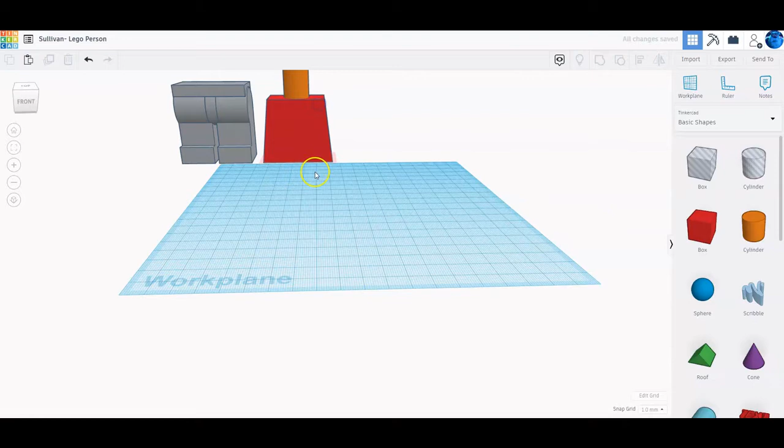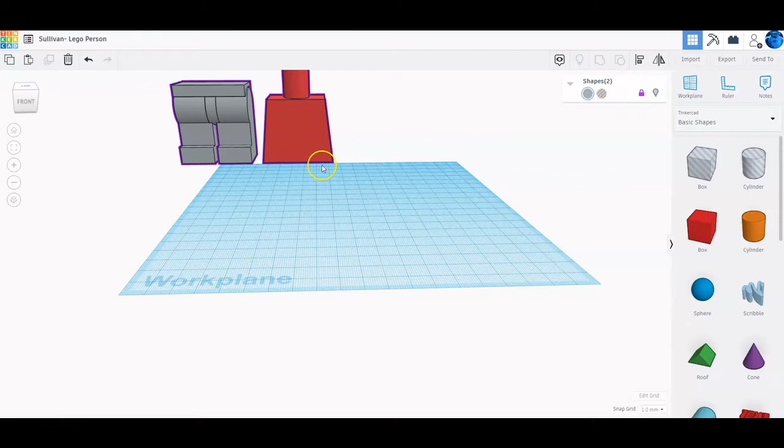First, we're going to take these two back here and select them. We're going to select both of them and lock them. All I did was click the little lock in the inspector window. That makes it so I can't move them around, select them, or group them with something else. Just makes it a little easier so we can still utilize this work plane.

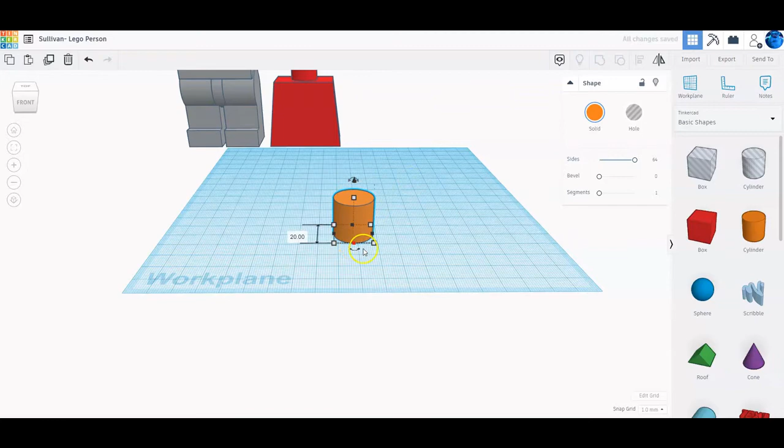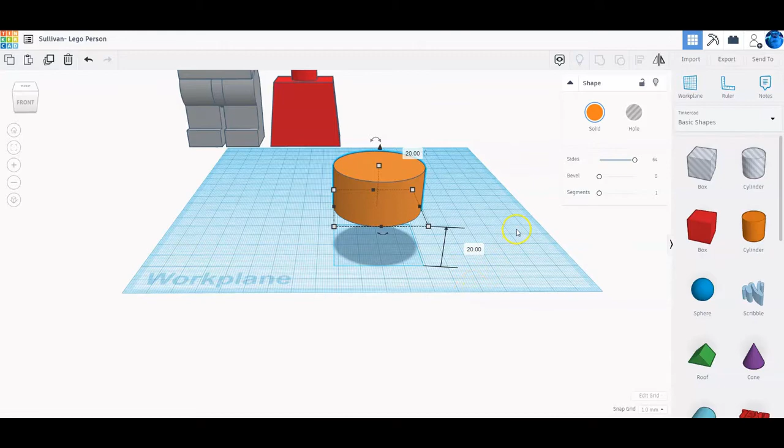So the first thing we're going to do for the head is bring out a cylinder. We're going to change the number of sides because we want it nice and smooth. Then we're going to resize it, only resizing the X and Y to 41, so 41 by 41 by 20. Then we're going to lift it up 20, remember you're looking at this number right here. Now we have essentially the main portion of the head right there.

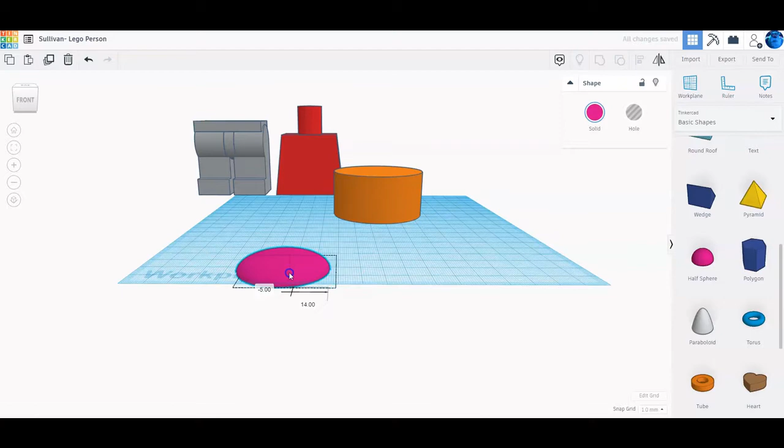Now we need to create the rounded portion on top and bottom, so we are going to use a half sphere. We'll bring that out and lower the Z down to 7.5. Then we're going to take this and also go to 41 by 41. That is going to be the rounded portion of the head.

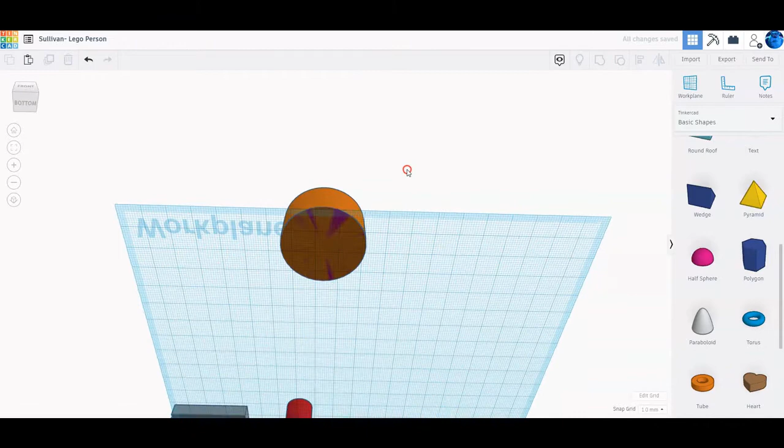Now we're going to take that, lift it up 20 just like we did with the cylinder. Then we're going to select both of them and align them, so we want to go centered here, and then centered here, to where unless you look underneath, you really won't be able to see the half sphere. The reason why we did that is because now we can select the cylinder, press the D button on your keyboard, and it drops down perfectly aligned.

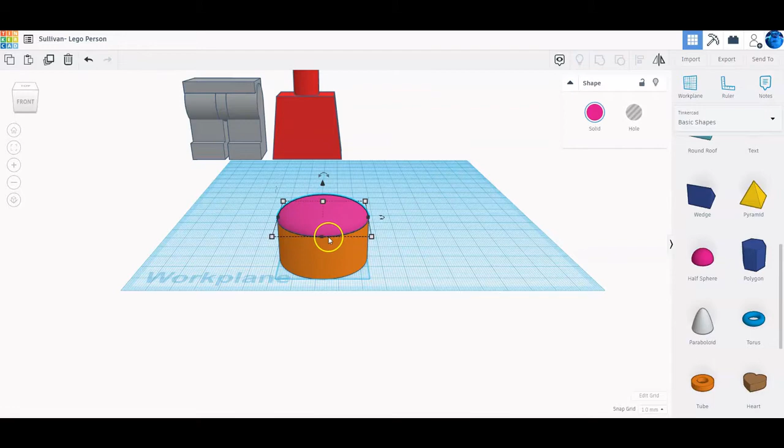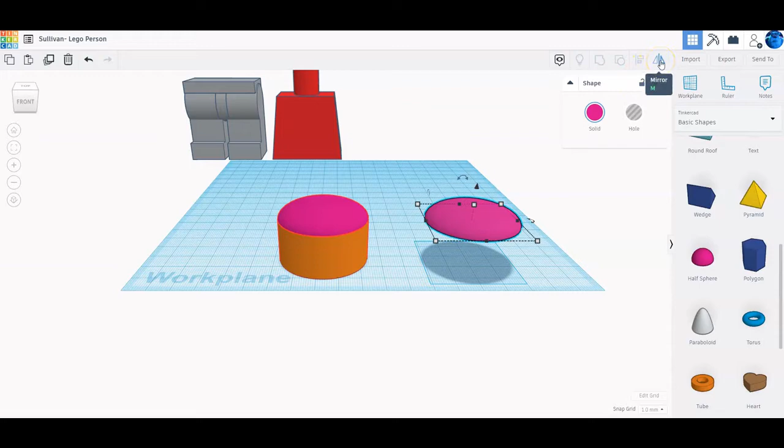Kind of cool, huh? So now I'm going to select the half sphere, duplicate it, and move it off to the side. Then I'm actually going to group these two together like this. Once it's done there, we'll give it a minute. I'm going to flip this one using the mirror tool, and flip it like that.

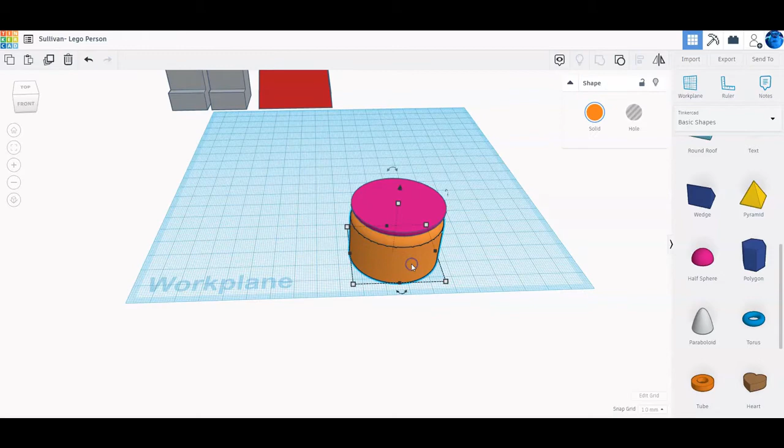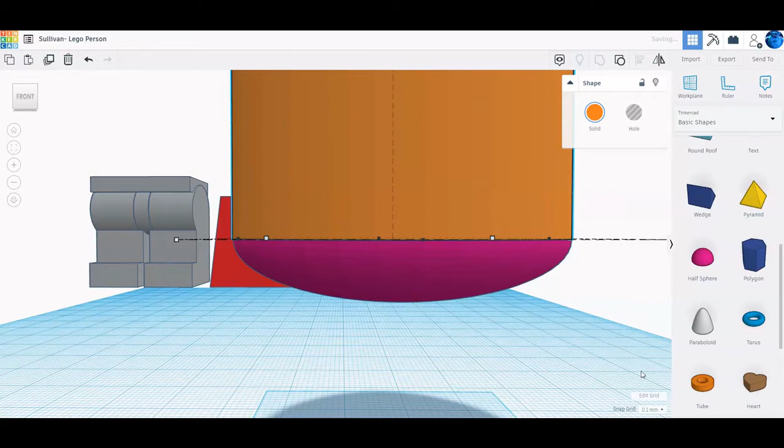Then I'm going to do the alignment to center and center, and from here I am then going to take the main portion of the head and lift it up until it is aligned. We can double check and make sure that is actually aligned by looking at it like this. See how we can kind of see through it a little bit? Let's change the snap grid down to 0.1, hold Control and use that down arrow, and slowly drop it down until it is perfectly aligned. Now we select both, group it together.

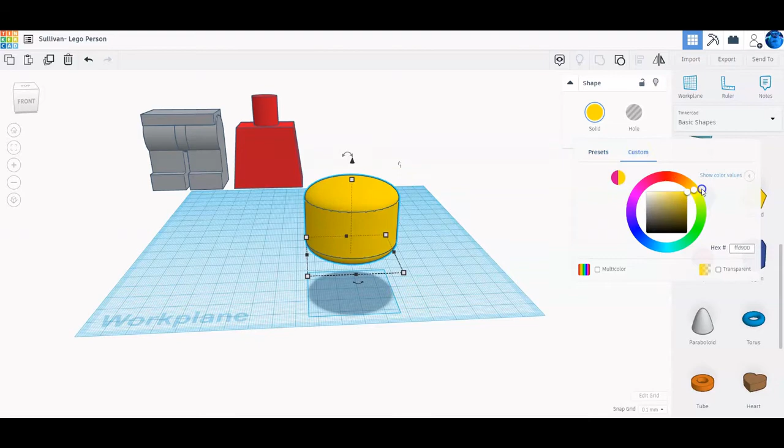And then let's change it to yellow. So we have the main portion of the head. It's kind of a weird yellow, let's change the yellow here. There we go, that's more like what it should be.

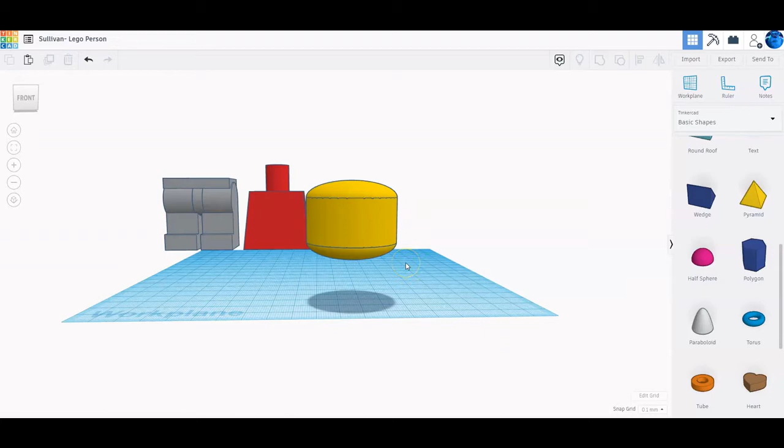Alright, so now we need to make the neck for the head and the top for the head. Both of these are going to follow pretty much the same process, just one's going to be a little bit bigger than the other. So we're going to bring out another cylinder. First, let's get this guy out of the way a little bit. We're going to bring out a cylinder, and for this one we're going to resize it. We're going to keep it 20 by 20, but we're going to go from 20 on the Z to 8.

And then, of course, change the sides to make it nice and smooth.

Once that is done, we're going to grab a hole cylinder, bring that out. Same thing, sides go to 64. And then for this one, we're going to change all three axes.

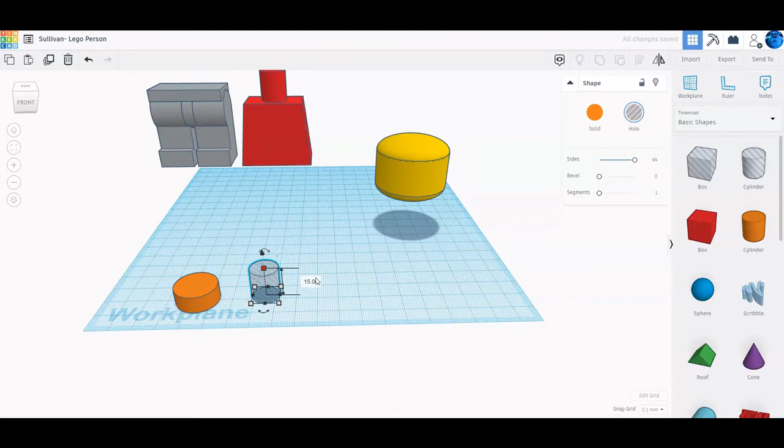We're going to go to 13 by 13 by 15. There we go, 15. And then from here, we are going to align these two. So centered, centered, and group.

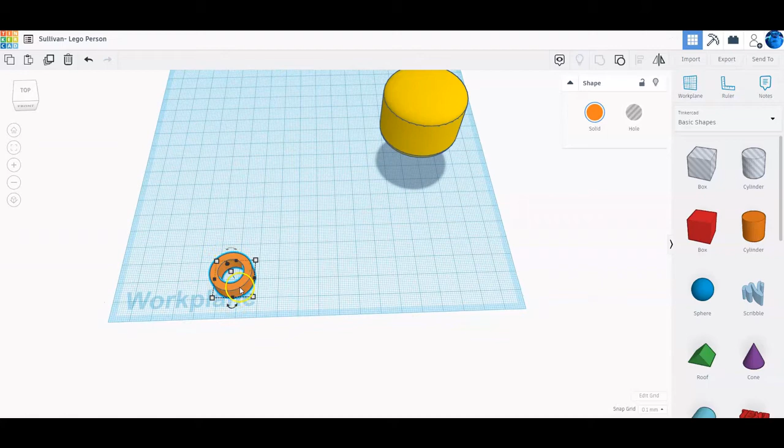So we're going to cut out the center portion of this circle right here. Alright, now let's take that, we're going to move that off to the side. We're going to do pretty much the same thing. So we're going to bring out another cylinder, change the sides to 64.

This one we're going to resize to 27 by 27 by 6.

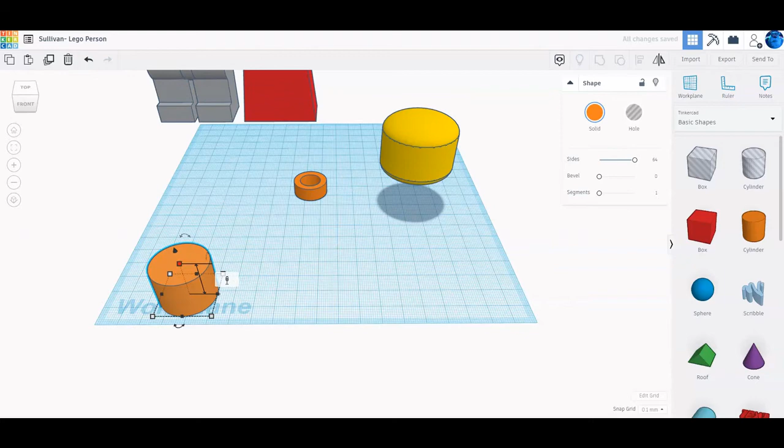Okay, then another hole cylinder. Sides go to 64. And then this one, we're going to change to 19 by 19 by 14.

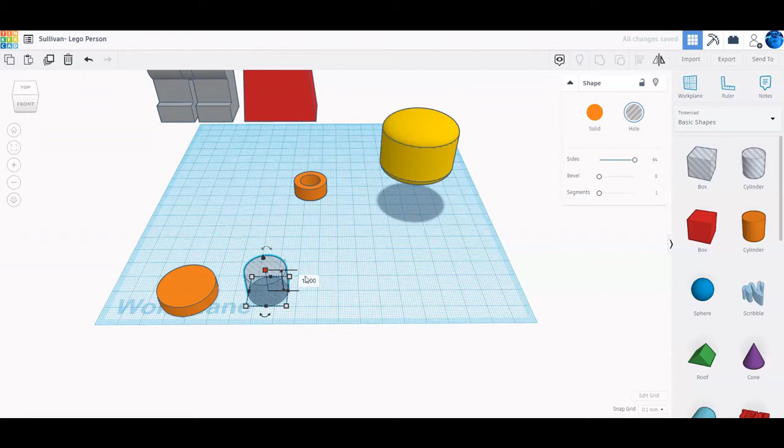And then I'm pretty sure you guys can guess the next step. If you guessed alignment, you guessed right. So we're going to align it, we're going to center it, we're going to group it, and you now have the neck.

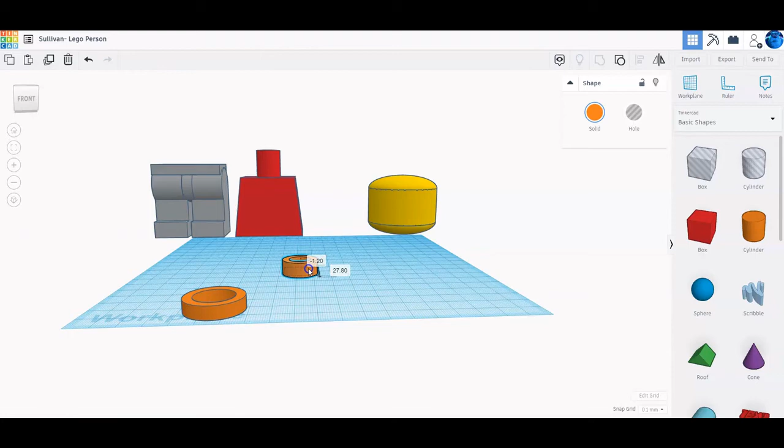Okay, so what we're going to do now is we're going to bring this one over and this one over. You can see kind of that blue box that's underneath it. That's how you can kind of see generally where it's at. And we're going to lift this up because we want this above the head.

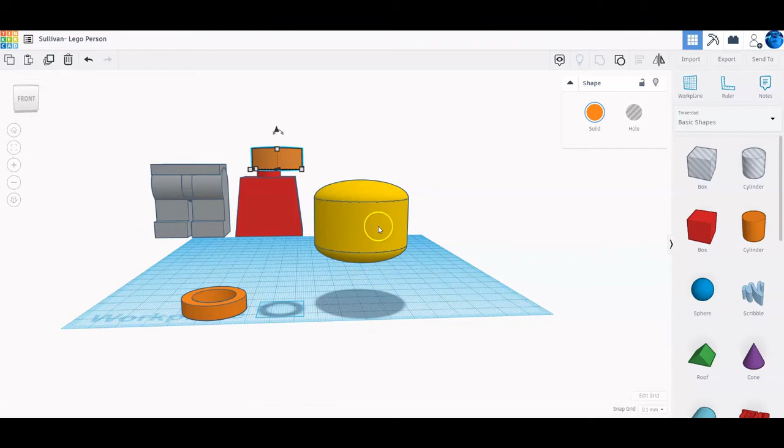The reason why we did that is because we're going to center this and then we're going to slowly move things around. So I'm going to go to where I can select all three of these. I'm going to go to center, so I'm going to center along the X, center along the Y, and then from here, I will move things around.

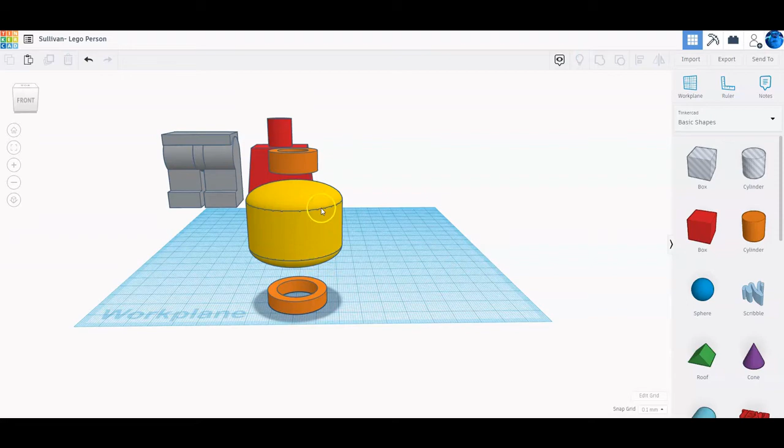Alright, so I'm going to start by moving the top two, and I'm going to bring it down onto the neck, and then I'll move the top back onto it. So I'm going to select the top portion of the head and the main portion of the head, and then I'm going to drop those down

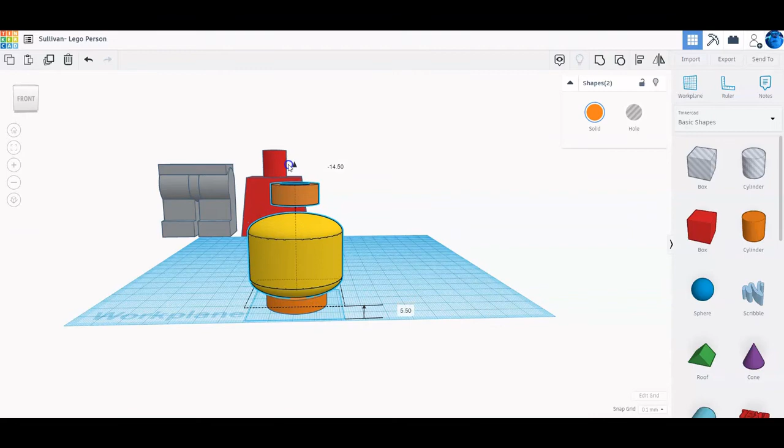until they are just barely touching down here. So I could still see that lip right here, so I want to bring that down just a little bit more until that lip goes away and it looks like this.

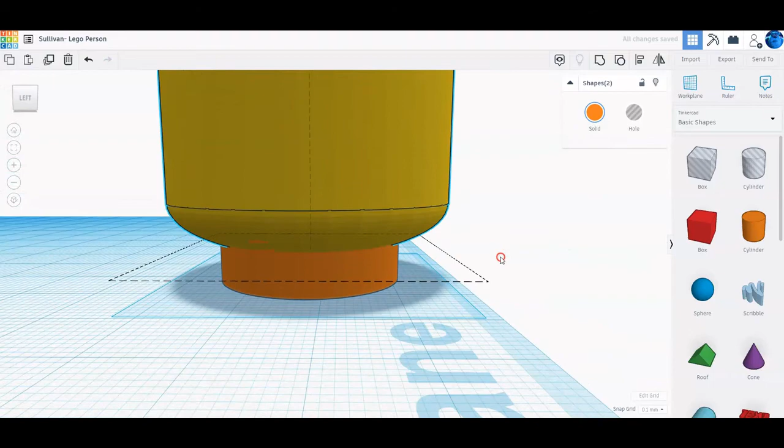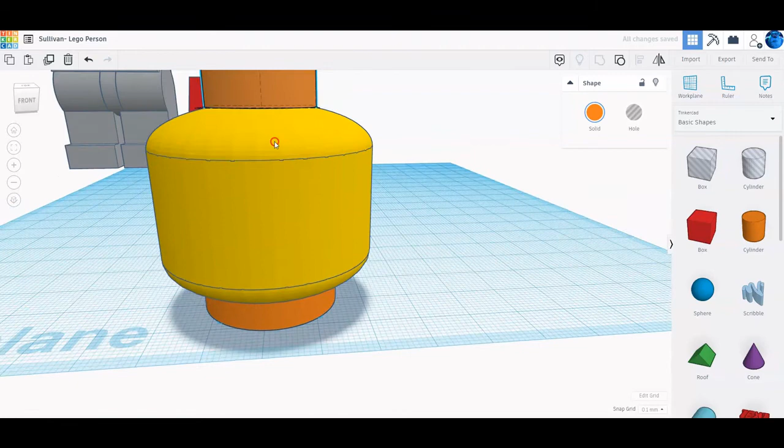Alright, so that bottom portion is done. Now I can grab just the top portion and do kind of the same thing. Let's bring it down. I still have it on snap grid 0.1, so it moves really slow. Hold control and the down arrow until you can see that black line right here. Once that kind of goes away, you're down low enough. Right there.

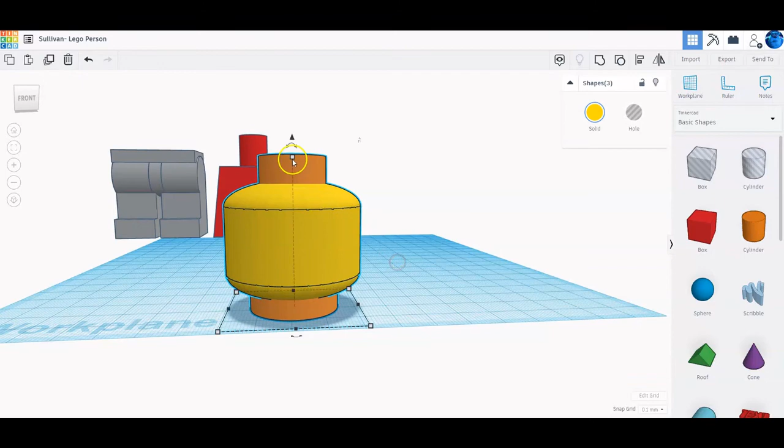And your overall height for this, for all three of these objects, should be 46, which means I did it right. So what I'm going to do now is I'm going to group it.

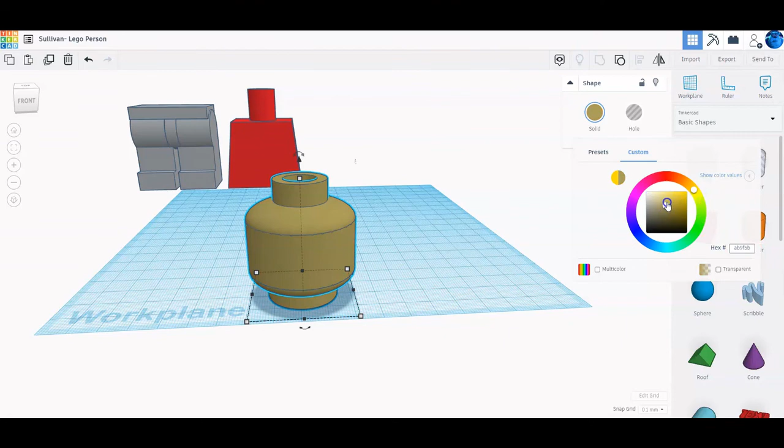Make sure that you change the color to yellow. What I do for the color is I go here, I click on the preset because it'll get me close. It's a little off. And then I go to custom, and this down here should be FFD900, or you just take this little slider right here and you go all the way up into the corner, and I'll give you that kind of that Lego yellow. So that's what I got for you.

There is your head. Of course, we need to take it and put it in the shapes collection. So all I'm going to do is I'm just going to click on create shape. And then I will go to and label it. Let's go Lego head.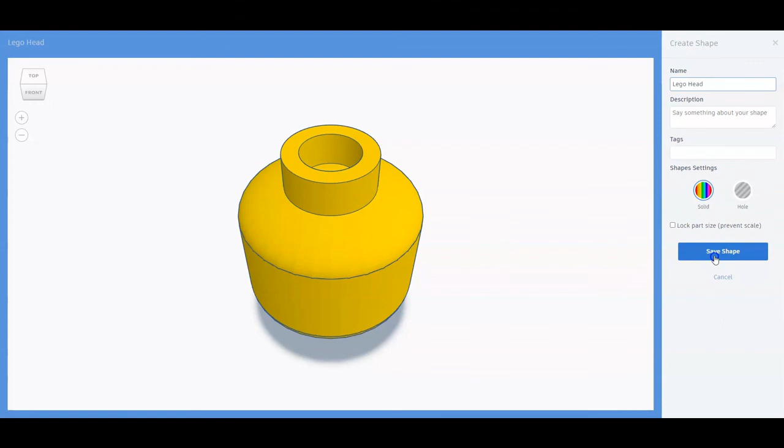Let's capitalize that L just for me. And save shape. Lego head is saved. And let's lock it so we can't change it.

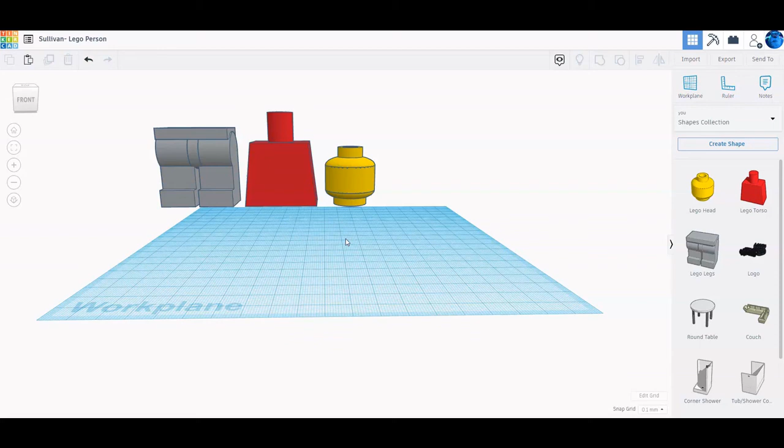Done. So in the next video we'll go over the arms, and then after that I think all we got left is assembly. So that's what I got. Hopefully you learned something. See you in the next video.